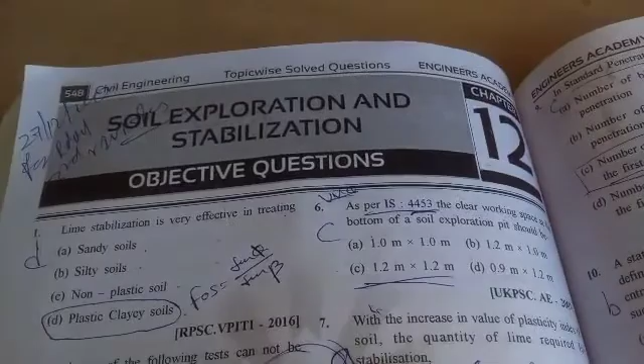Hi guys, I'm again here with some civil engineering problems related to soil exploration and stabilization. Let us solve some questions which are given in this book. The questions are 37 in number. Okay. The main topic of this is soil exploration and stabilization.

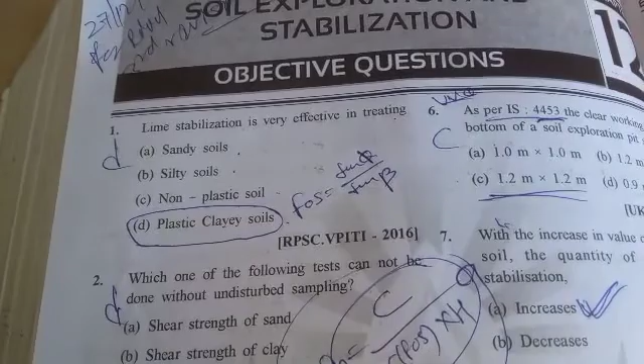Question number 1 is: lime stabilization is very effective in treating what? Plastic clay soil. This came in RPSC VP ITI 2016. And question number 2 is: which one of the following tests cannot be done without undisturbed sampling? Atterberg limits cannot be done. Other things can be done with the undisturbed sampling.

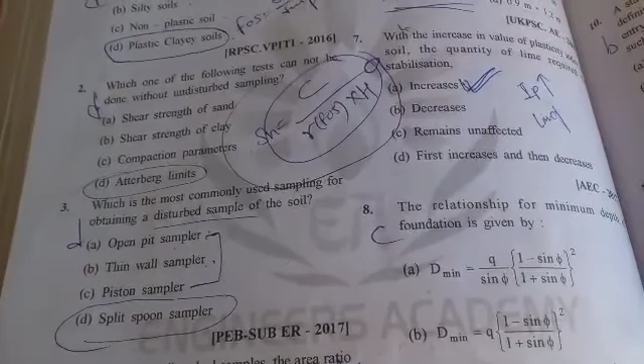Okay. Which is the most commonly used sampler for obtaining a disturbed sample of a soil? Piston sampler, thin wall sampler, open pit sampler, these are not, and the most commonly used sampler for obtaining a disturbed sample of the soil is the split spoon sampler. By this sampler we can obtain the disturbed sample.

Okay. For collecting undisturbed samples, the area ratio of the sampler is to be less than 10%. Okay, the area ratio should be how much? Less than 10%, right? Now, question number 5. The free fall of hammer in a standard penetration test is equal to how much? Equal to 75 centimeter or 750 mm. This came in LBS Assistant Professor 2017.

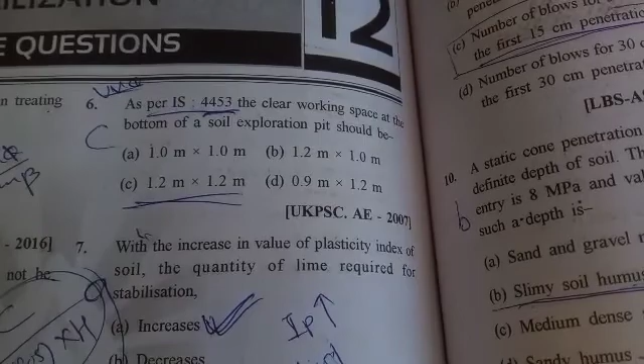Now move to the next question, question number 6. As per IS 4453, the clear working space at the bottom of a soil exploration pit should be 1.2 meter by 1.2 meter. It is recommended through the Indian Standard 4453. Okay. And what is recommended? The clear working space at the bottom of a soil exploration pit. That is 1.2 meter by 1.2 meter. It came in UKPSC AE 2007.

Now move to the next question. Question number 7. With the increase in value of plasticity index of soil, the quantity of lime required for stabilization will increase. More lime will be required as the plasticity index of a soil increases. Okay. Now let us move to the next question.

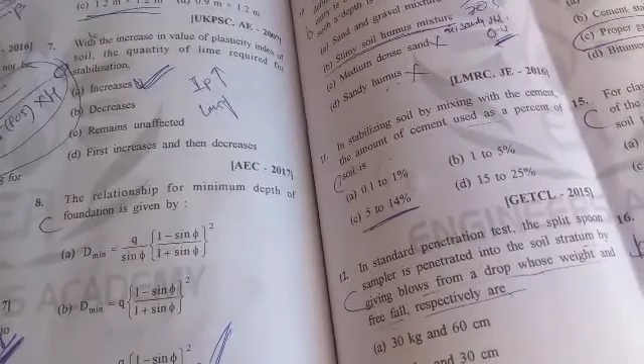The relationship for minimum depth of foundation is given by, this is very important. The minimum depth, denoted by D minimum, is equal to q by gamma, where gamma is the unit weight, times 1 minus sin phi by 1 plus sin phi, whole square. This is the relationship for minimum depth of foundation. Now let us move to the next question. Question number 9.

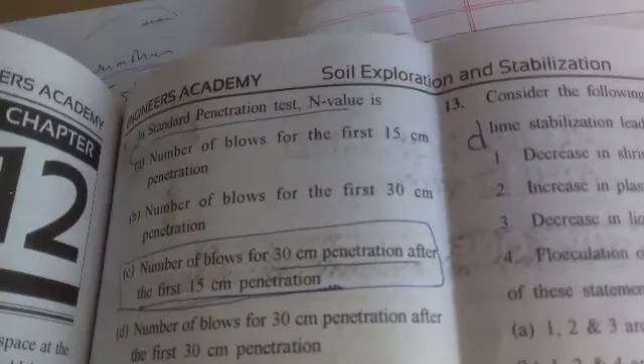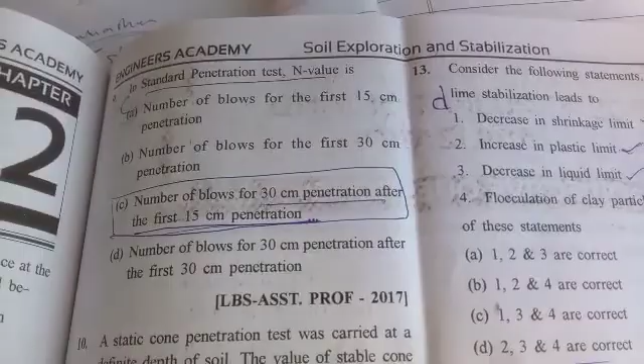In standard penetration test, N value is what? N value is the number of blows for 30 centimeter penetration after the first 15 centimeter penetration. That is called the N value. Okay. Now let us move to the next question.

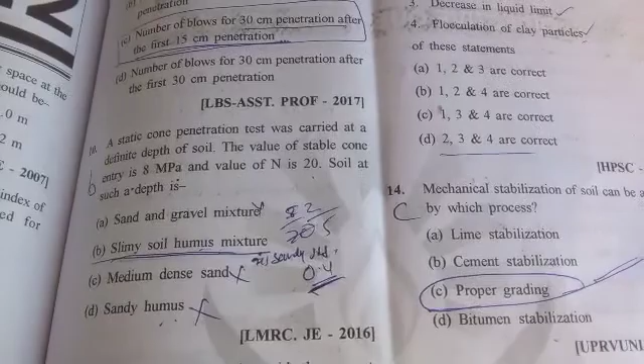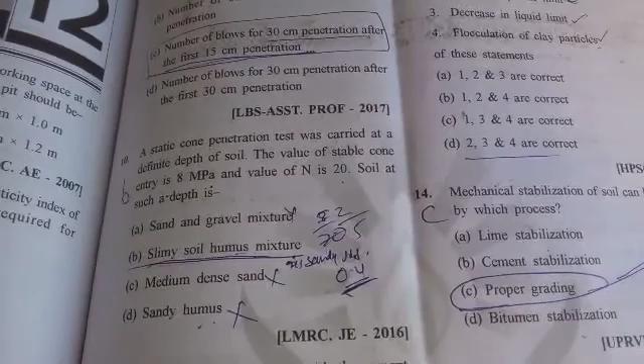Question number 10. A static cone penetration test was carried out at a definite depth of soil. The value of static cone resistance is 8 megapascal and the value of N is 20. Soil at such a depth is what? Slimy soil humus mixture. You should memorize these terms: the static cone resistance is 8 megapascal and the value of N is 20. So soil at such a depth is slimy soil humus mixture.

Now question number 11. In stabilizing soil by mixing with cement, the amount of cement used as a percentage of soil is what? 5 to 14% of soil is required. Okay. In stabilizing soil by mixing with cement, the amount of cement used as a percentage of soil is 5 to 14%. Now let us move to the next question, number 12.

In standard penetration test, the split spoon sampler is penetrated into the soil stratum by giving blows from a drop hammer whose weight and free fall respectively are? Very, very important question. What is the weight? The weight will be 63.5 kg. And what is the height of free fall through which we drop the hammer? That is 75 centimeter or 750 mm. Okay. Now let us move to the next question.

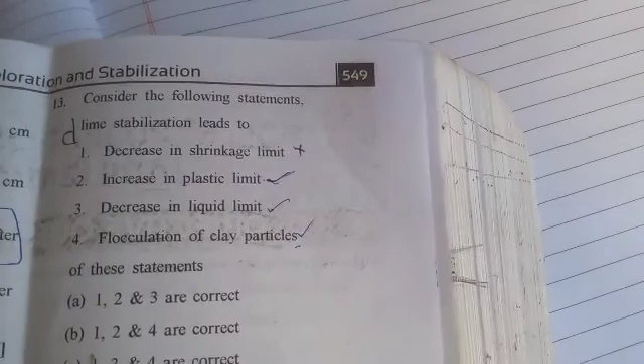Question number 13. Consider the following statements. Lime stabilization leads to what?

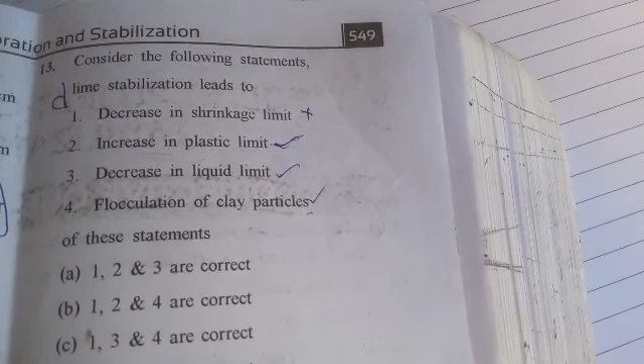Leads to decrease in shrinkage limit? No. Increase in plastic limit? Yes. Decrease in liquid limit? Yes. Flocculation of clay particles? Yes. All these three things will happen in lime stabilization, and the first, decrease in shrinkage limit, this will not happen. So the correct answer is 2, 3, 4.

Okay. Now let us move to question number 14. Mechanical stabilization of soil can be achieved by what? Proper grading. Through proper grading we can achieve the mechanical stabilization of soil, right? Now question number 15. For clay of moderate to high plasticity, which of the following agents is the best for improving soil properties? Lime. Lime is the best material to improve the soil properties.

Now question number 16. The area ratio of the split spoon sampler is 112%. This is the direct answer we have to remember. It was asked in Airport Authority of India JE 2015. The area ratio of the split spoon sampler is

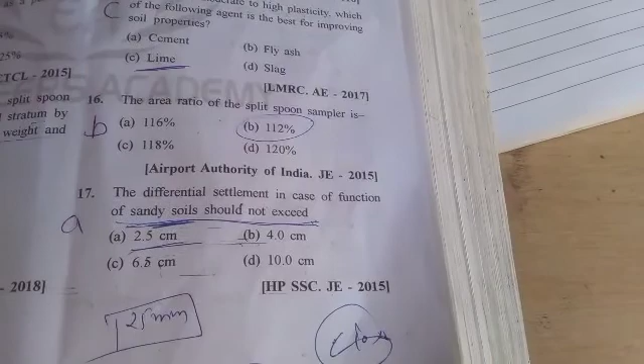112%. The differential settlement in case of foundations on sandy soils should not exceed what? 2.5 centimeter, 6.5 centimeter, 4.0 centimeter, or 10.0 centimeter. The correct answer is 2.5 centimeter or 25 mm. For sandy soils the differential settlement should not exceed 25 mm.

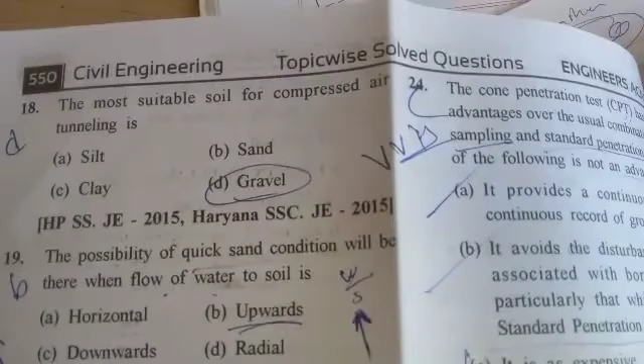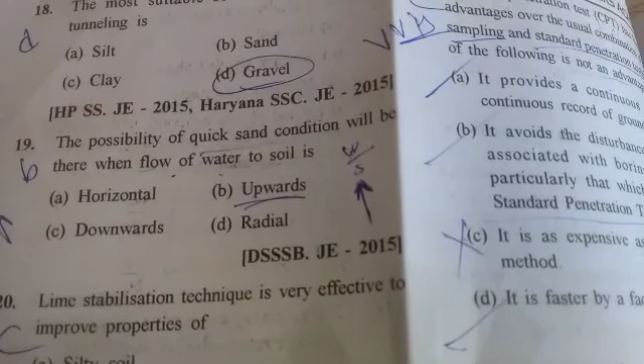Okay. Now let us move to the next question. Question number 18 is here. The most suitable soil for compressed air tunneling is what? Gravel. Question number 19. The possibility of quicksand condition will be there when the flow of water through soil is what? Upward. Then the quicksand condition will happen.

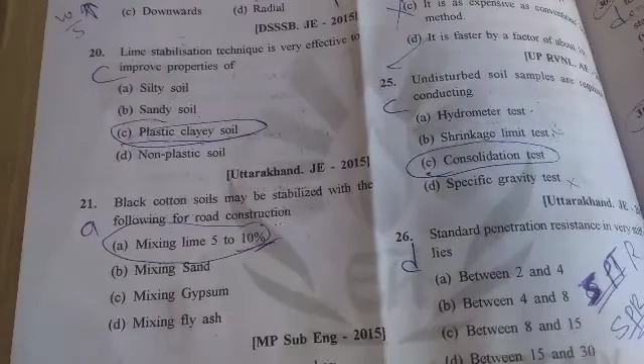Question number 20. The lime stabilization technique is very effective to improve properties of plastic clay soil. Okay. The black cotton soils may be stabilized with the following for road construction. The correct answer is mixing lime 5 to 10%. Question number 22. The largest value of stability number is 0.261. Please remember this. Very, very important. 0.261. The compressibility of sandy soil is very less in comparison to clay. So A is the answer here. Now let us move to the next question.

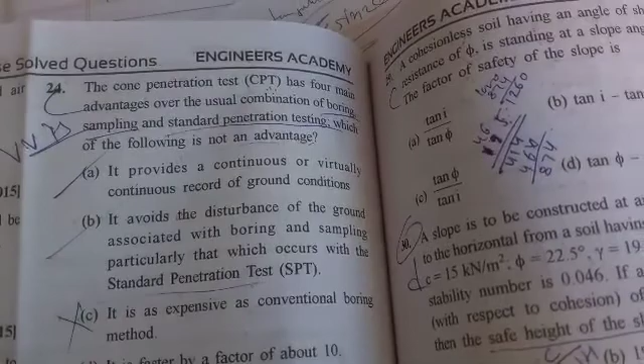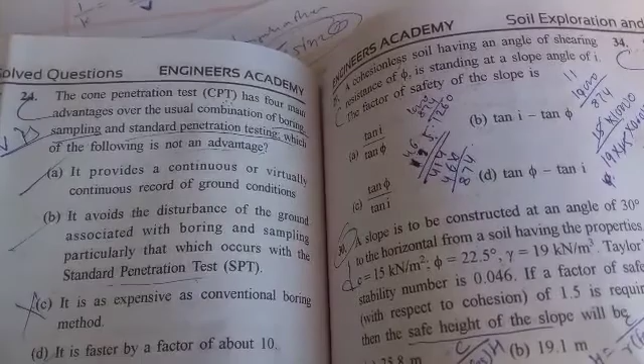Question number 24. The cone penetration test, CPT, has 4 main advantages over the usual combination of boring, sampling and standard penetration testing. Which of the following is not an advantage? See, it provides a continuous or virtually continuous record of ground conditions. Yeah, this is an advantage. It avoids the disturbance of the ground associated with boring and sampling, particularly that which occurs in the standard penetration test. Yeah, this is also an advantage.

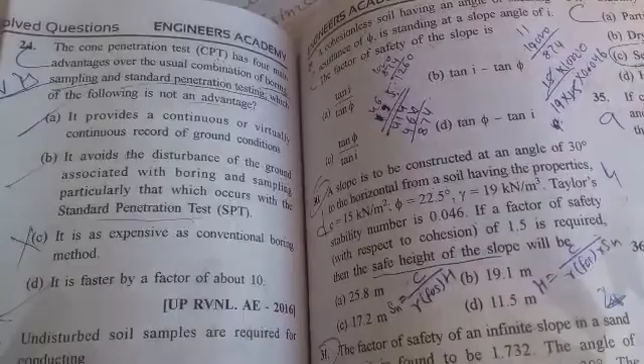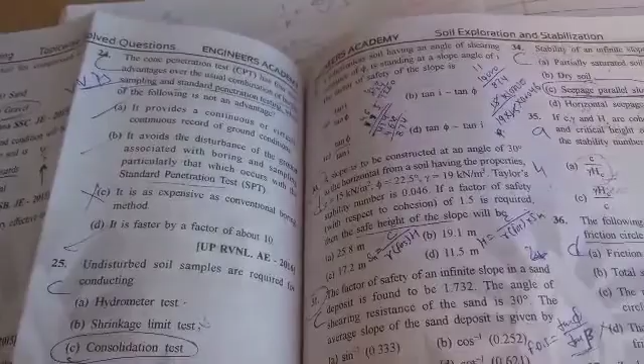It is as expensive as the conventional boring method. This is not an advantage. The correct answer is C. Fourth is also an advantage, it is faster by a factor of about 10. Okay, so answer C is correct. Question number 25. Undisturbed soil samples are required for conducting what? Consolidation test. Undisturbed soil samples are required for conducting the consolidation test.

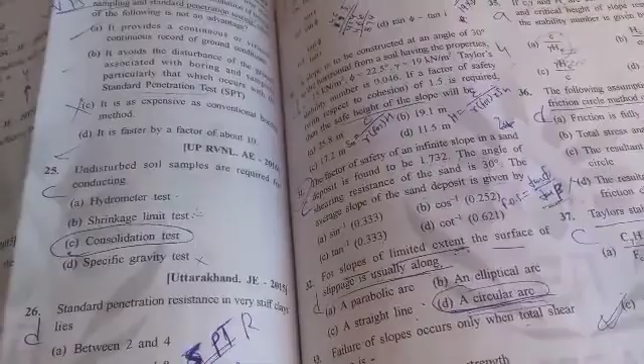And question number 26. The standard penetration resistance in very stiff clay lies between what? Between 15 to 30. D. The standard penetration resistance in very stiff clay lies between 15 and 30. Okay. Question number 27. The disturbed samples are obtained by thin walled sampler. Using the thin walled sampler we can obtain the undisturbed samples.

Okay. The largest practically possible value of stability number is 0.261. It came earlier. Okay, please remember. It is again repeated. Now let us move to question number 29. Okay.

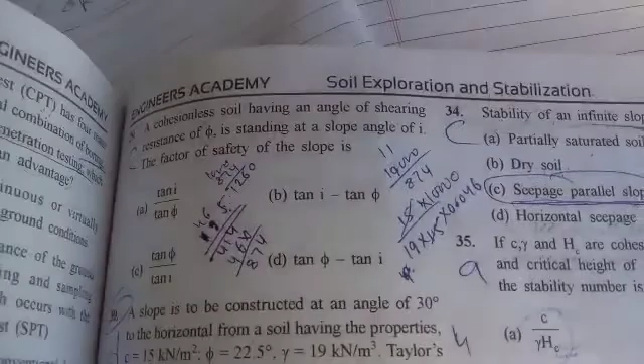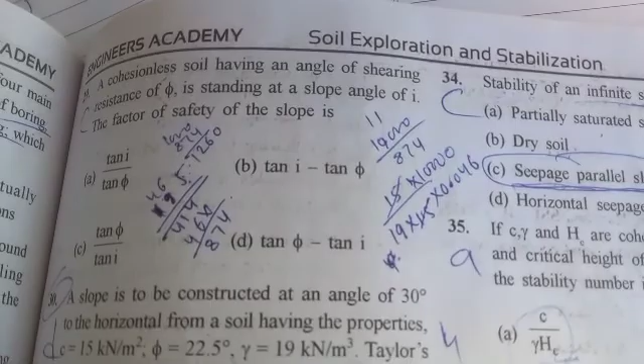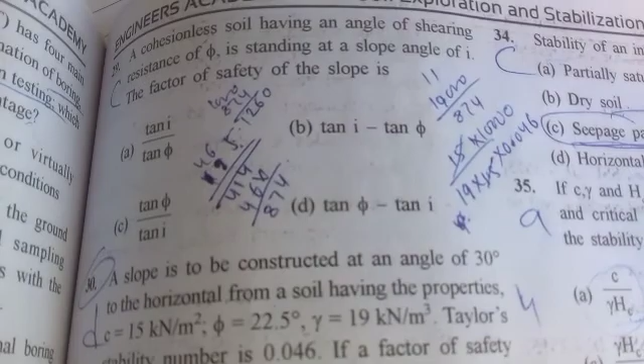A cohesionless soil having an angle of shearing resistance of phi is standing at a slope angle of I. The factor of safety of the slope is what? The answer is C. The factor of safety of the slope can be obtained using tan phi upon tan I. Phi is the shearing resistance angle and I is the slope angle. So we can obtain the factor of safety using this formula, tan phi upon tan I.

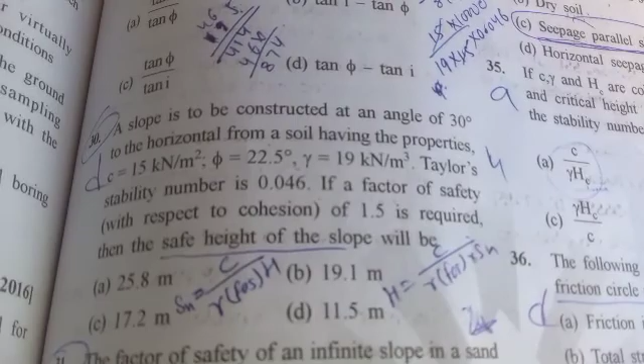Now let us move to question number 30. A slope is to be constructed at an angle of 30 degrees to the horizontal from a soil having the properties where cohesion C is 15 kN per meter square, phi is 22.5 degrees, gamma is 19 kN per meter cube. Now the Taylor stability number is given as 0.046. If a factor of safety with respect to cohesion of 1.5 is required, then the safe height of the slope will be, the formula is here Sn.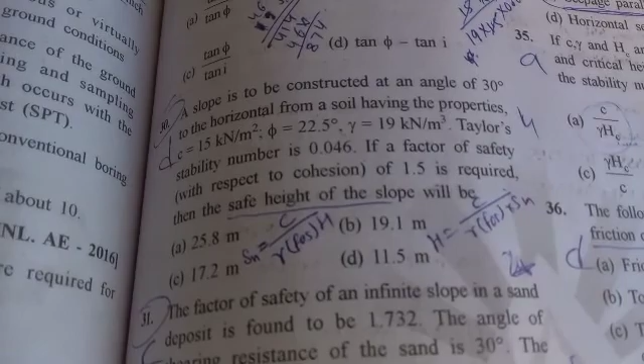Sn is equal to C upon gamma, factor of safety, H. So what we need is the safe height. So H we can calculate from here. So H is equal to C upon gamma, factor of safety into Sn. So when we put the value of these three things, the answer will come. What will be the answer? 11.5 m.

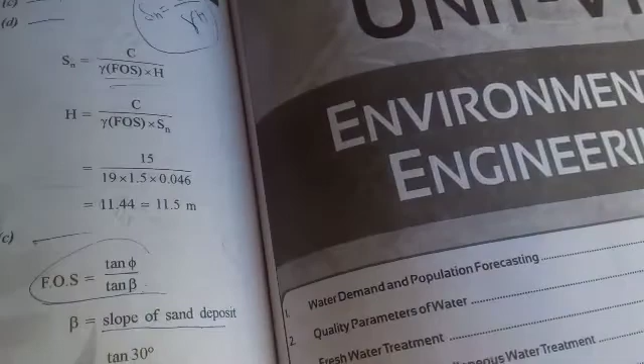Let us see the explanation of question number 30. The explanation is given here. Sn is equal to C upon gamma Fs into H, where H can be obtained using this formula: C is equal to gamma Fs into Sn into H. So C is 15, unit weight is 19, factor of safety is 1.5, and stability number is 0.046. So by multiplying the numbers below and then dividing, we can obtain 11.4 meter, nearly 11.5 meter. Okay, so let us move to the next question.

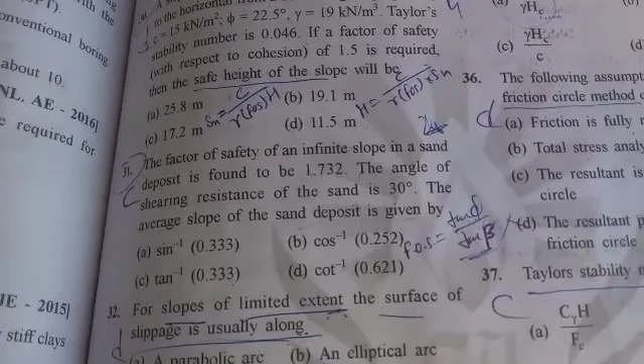Question number 31. The factor of safety of an infinite slope in a sand deposit is found to be 1.732. The angle of shearing resistance of the sand is 30. The average slope of the sand deposit is given by C. What is factor of safety? Factor of safety is equal to tan phi upon tan beta. So let us see the explanation of this question number 31. C. Factor of safety is tan phi upon tan beta.

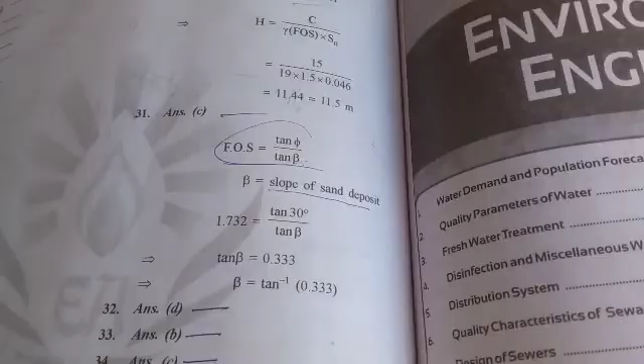So beta is the slope of the sand deposit. The factor of safety is given as 1.732 and tan phi is given, and tan beta we have to calculate. So tan beta is equal to 0.333. So beta is equal to tan inverse 0.333. So in question number 31, the answer is C, tan inverse 0.333. Now question number 32.

For slopes of limited extent, the surface of slippage is usually along a circular arc, right? And for question number 33, failure of slopes occurs only when total shear force is greater than total shear strength. Then the failure of slopes occurs. Okay, let us move to question number 34, which is a very important question.

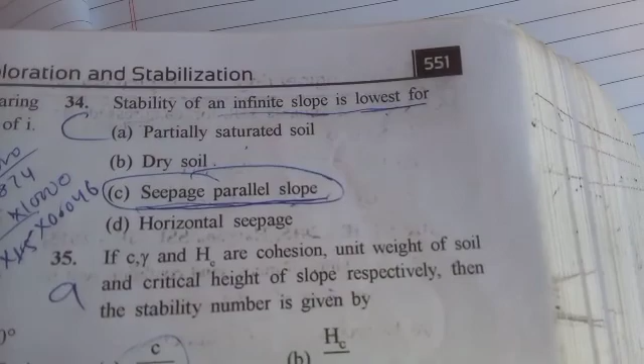Stability of an infinite slope is lowest for what? For dry soil, for partially saturated soil, for horizontal seepage? No, it is for seepage parallel to the slope. Then the stability of an infinite slope is lowest.

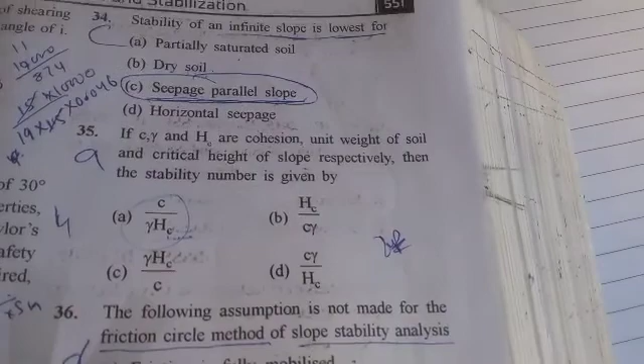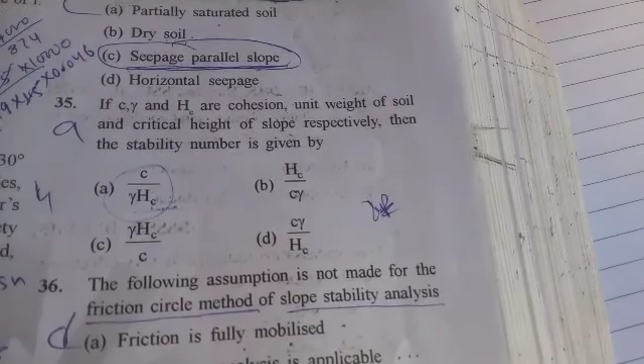For question number 35, C, gamma and Hc are cohesion, unit weight of soil and critical height of slope respectively. Then the stability number, we have seen the formula earlier. Stability number Sn is equal to cohesion upon unit weight into Hc, the height of slope, critical height we can say. So answer is A, C upon gamma Hc.

Question number 36. Which of the following assumptions is not made for the friction circle method of slope stability analysis? Friction is fully mobilized: this is an assumption we have to take in the friction circle method of slope stability analysis. Total stress analysis is applicable: this we will also take as an assumption.

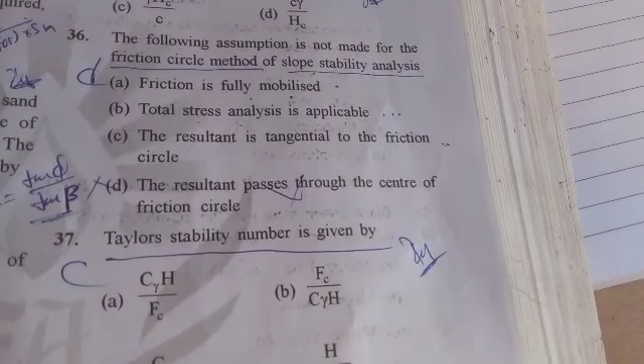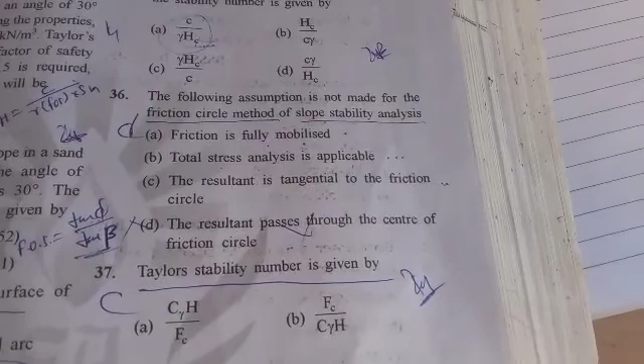The resultant is tangential to the friction circle. This also we will take. The resultant passes through the center of the friction circle. This we will not take as an assumption of the friction circle method of slope stability analysis. So D is the correct answer.

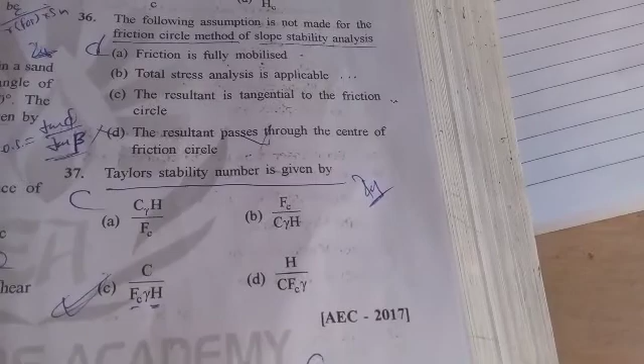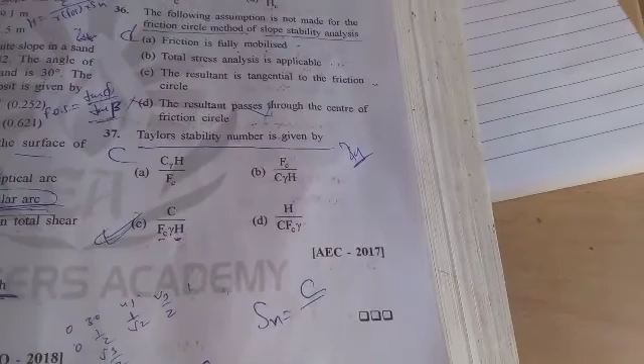C, Taylor's stability number. Again, C is equal to Sn Fc gamma h, where Fc is the factor of safety, gamma is the unit weight, h is the height, and C is the cohesion. So using this we can obtain Taylor's stability number. See, I have written so many formulas here, and the calculation also I have done here.

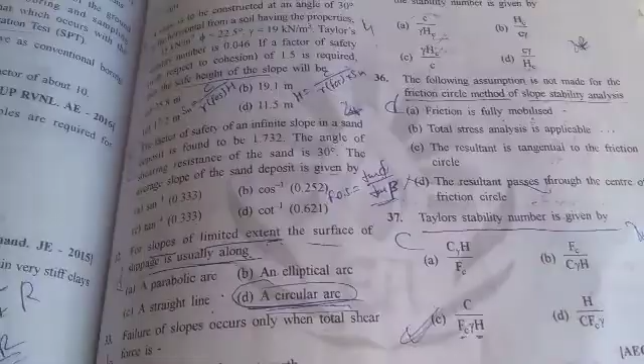So I have been continuously reading this book 4 times, and I am very happy to now tell some conceptual things about this. These are 37 questions of soil exploration and stabilization, which is a unit of soil mechanics and foundation engineering, right?